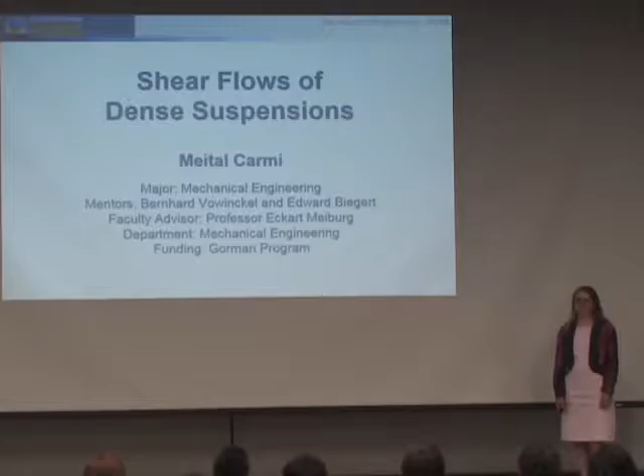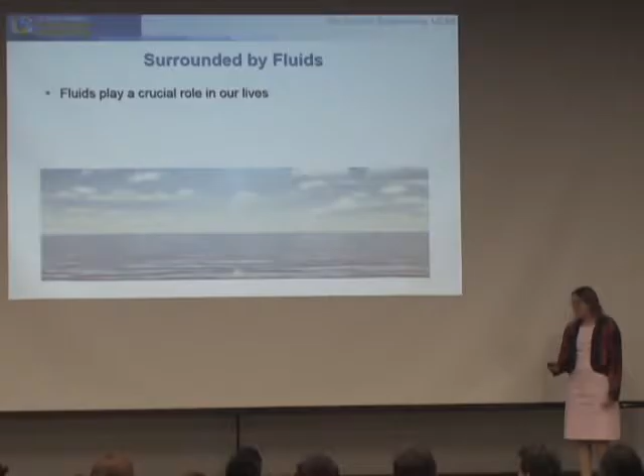Shear flows of dense suspensions with Bernhard Vowinckel and Edward Biegert. So, we live in a world filled with fluids. From the air we breathe to the water in our rivers and oceans, fluids are crucial to our everyday lives. However, we still don't understand many of their properties, such as the effect that occurs when a shear force is applied to a dense suspension.

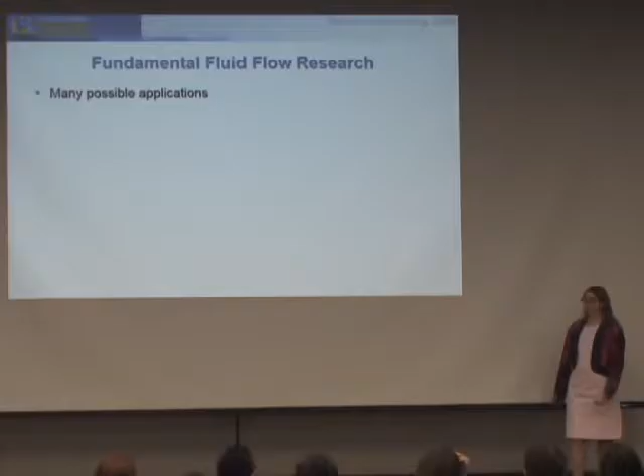Understanding this effect is the main goal of our research. We are doing fundamental research, meaning that there are a wide variety of possible applications, yet the only direct benefit is improving scientific knowledge. One possible application is to predicting and controlling mudslides and debris flows.

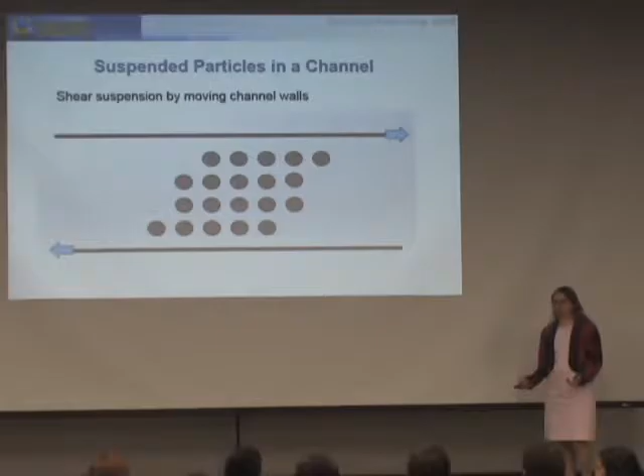So we are using a computer simulation to model particles in a channel. We apply shear force to these particles by moving the walls in opposite directions. This causes the fluid near the channel walls to move at nearly the same velocity as the walls, while the fluid in the center has zero velocity.

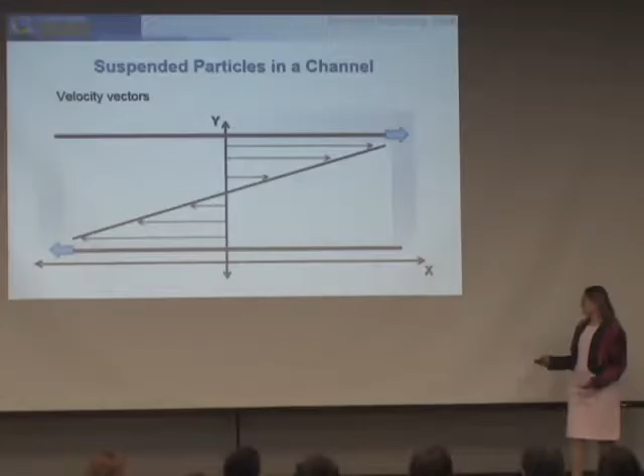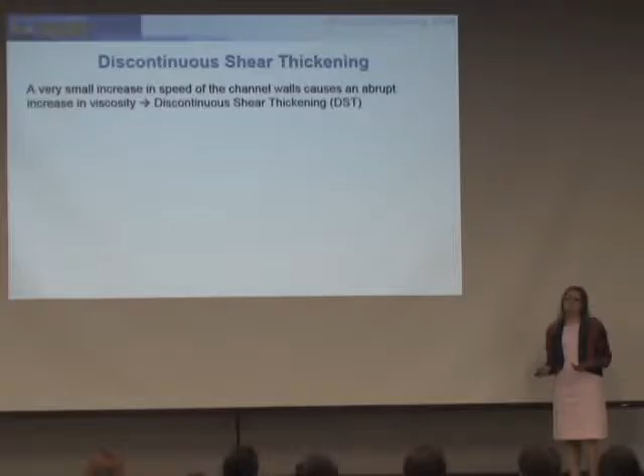So when we increase the velocity of the channel walls by very little, this causes an abrupt increase in the mixture's viscosity. And this effect is called discontinuous shear thickening, and causes the fluid to flow easily when the velocity of the walls is low, but to become very thick when the walls are moving faster.

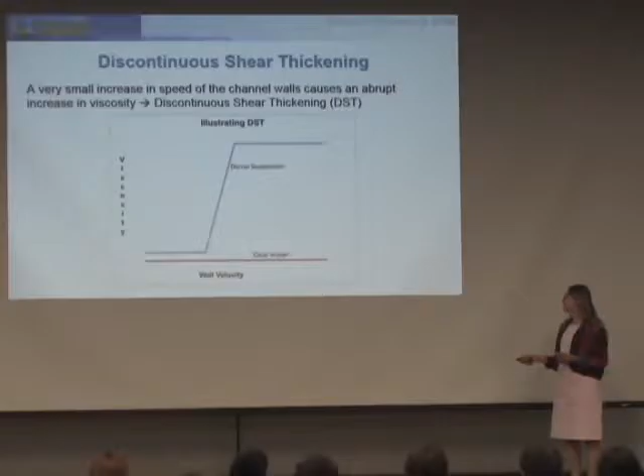And discontinuous shear thickening, or DST, occurs only in dense suspensions and does not occur in clear water flows, as seen in this graph of the viscosity of the clear water fluid and dense suspension as the wall velocity increases. Notice this abrupt increase in the viscosity of the dense suspension when the wall velocity is increased. This is DST. Also notice that the viscosity of the clear water is fairly constant.

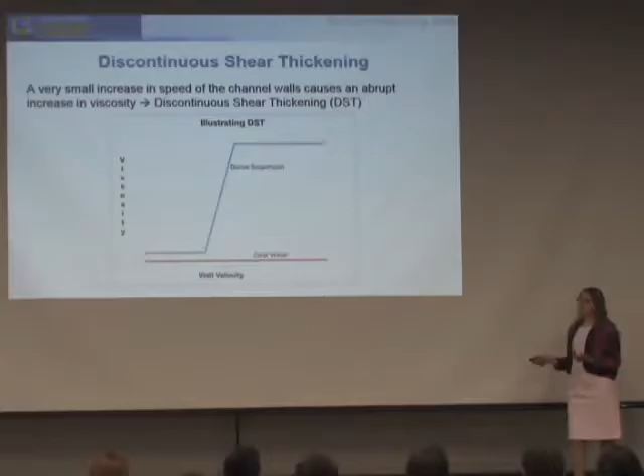And this suggests that DST is caused by some element of the particles' behavior, such as their clustering. And the main goal of our research is to understand the clustering behavior of the particles in the channel of moving walls that I just described.

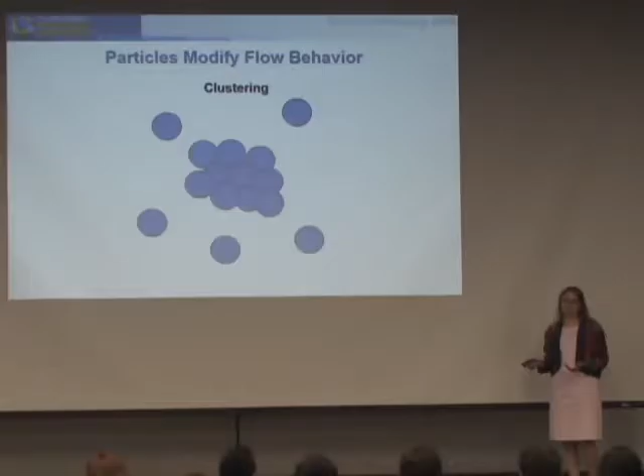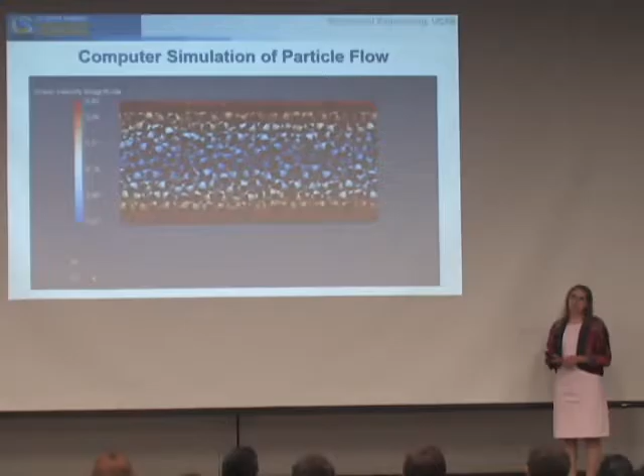So, this is an example of our computer simulation. You can see that particles near the walls are moving more quickly, and the particles in the center are moving more slowly. And this simulation models about 2,000 particles over several hundred time steps and outputs the position of each particle at every time step. And you can imagine this is a huge amount of data. So my job is to write MATLAB programs to organize this data to quantitatively measure the particles' clustering behavior.

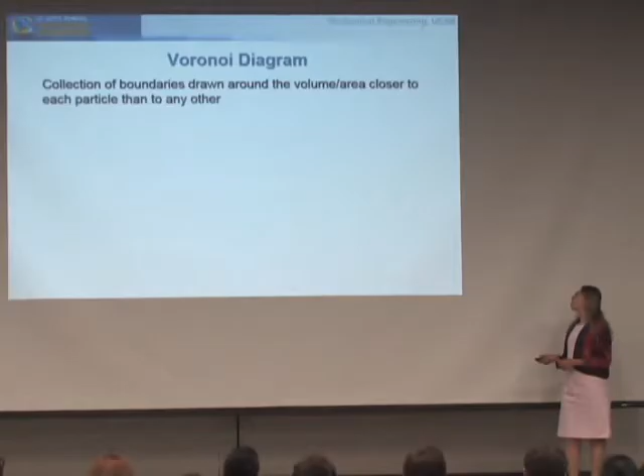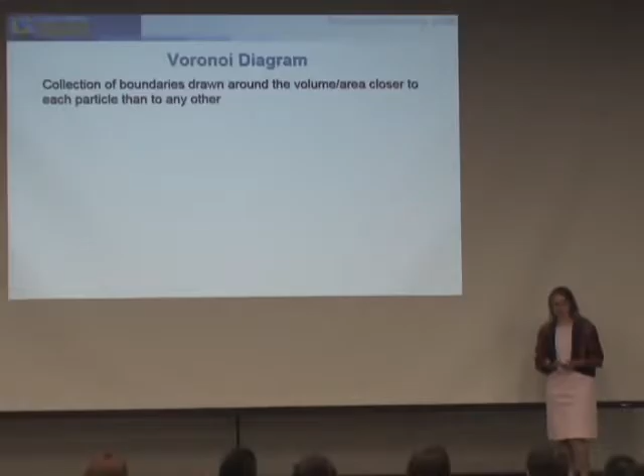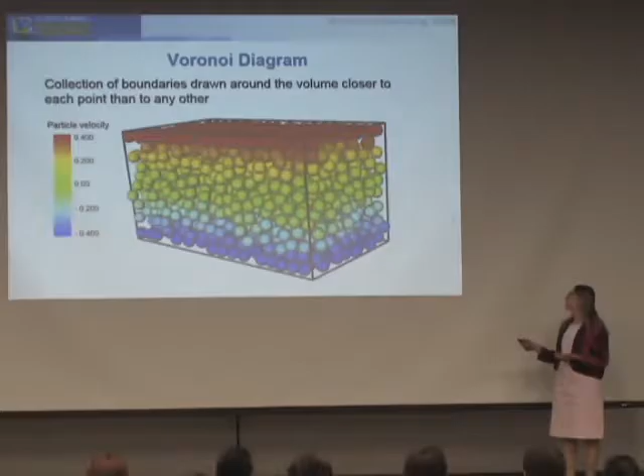Using the Voronoi diagram allows us to perform several calculations to quantitatively measure the particles' clustering behavior. Oh, and we apply the same concept described with the Voronoi diagram to our three-dimensional particles in the simulation to organize their position, as I said. So one such calculation that we can use from the Voronoi diagram is the volume of the Voronoi cells. And this gives us a measure of the particles' clustering.

So small volumes mean that the particles are tightly clustered together, while large volumes mean that the particles are farther apart. And then we graph the probability density function of these volumes to see the trend across all of the Voronoi cells. And a probability density function, or PDF, is the probability of being in an interval divided by the length of that interval, and measures the relative likelihood of a volume having a certain value.

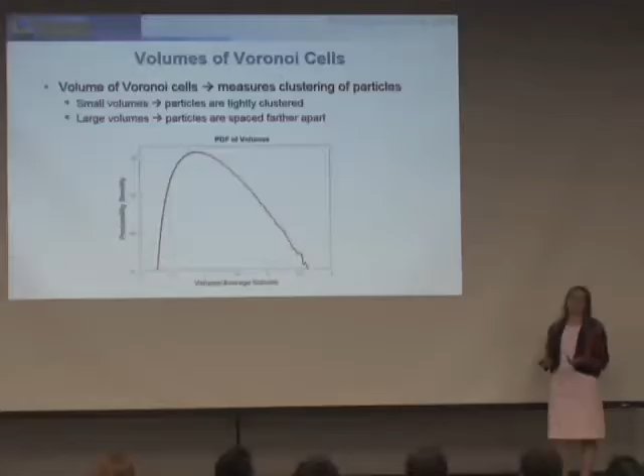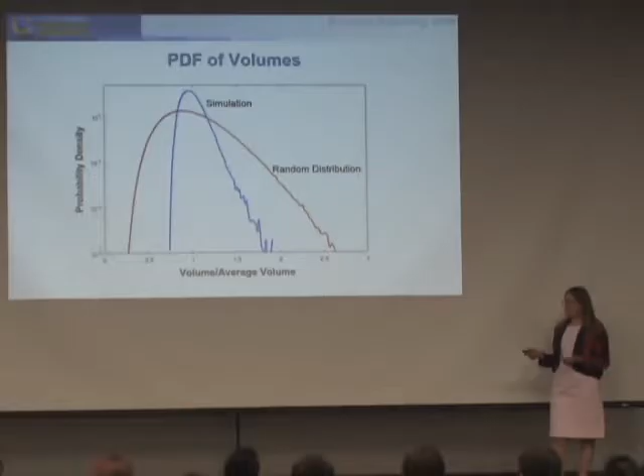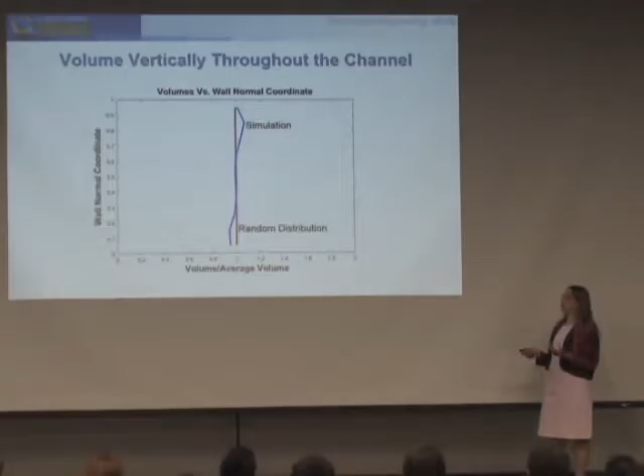To further analyze this volume data, we graph the volumes against the wall normal coordinate, or the coordinate perpendicular to the channel walls. And in this case, the volumes of the simulation are fairly constant vertically throughout the channel, which again suggests an even dispersion of the particles. And another calculation that we can perform is from the largest horizontal dimension to the largest vertical dimension of each of the cells.

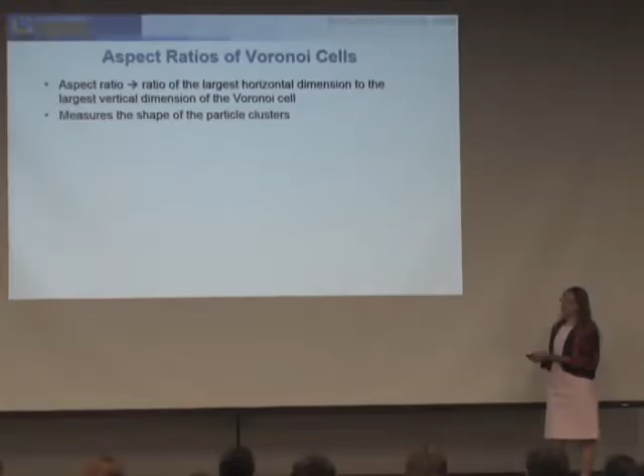And this measures the shape of the particle clusters. For example, if the vertical distance between particles is larger than the horizontal distance, then the aspect ratio would be less than 1. And if the horizontal distance is larger, the aspect ratio would be greater than 1. And if the horizontal and vertical distances are exactly the same, the aspect ratio would be 1.

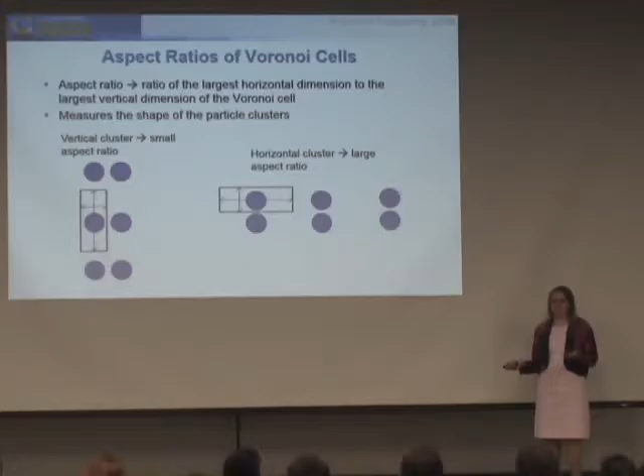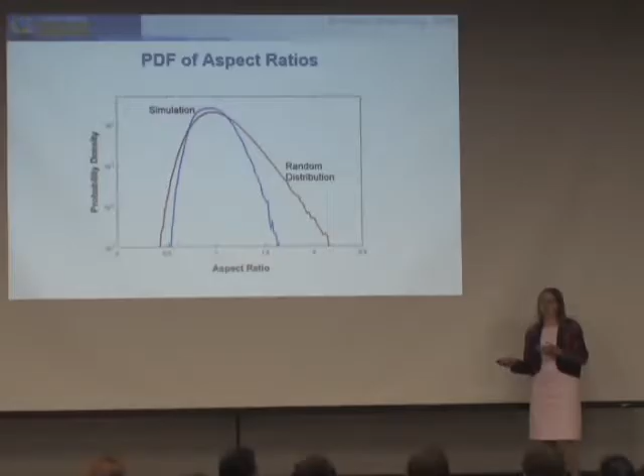So this is the PDF of the aspect ratios of the simulation data, again compared to a random distribution. And the simulation data is closer to and more symmetrically centered on 1, which again suggests an even dispersion of the particles, because this means that the horizontal and vertical distances between particles are about the same, or closer to the same than the random distribution. So this again suggests an even dispersion of the particles.

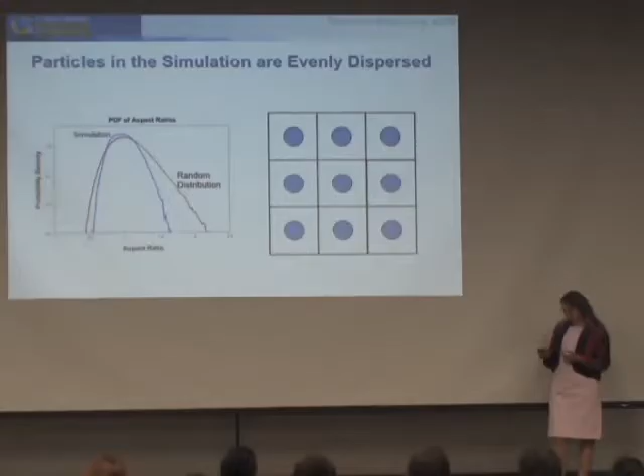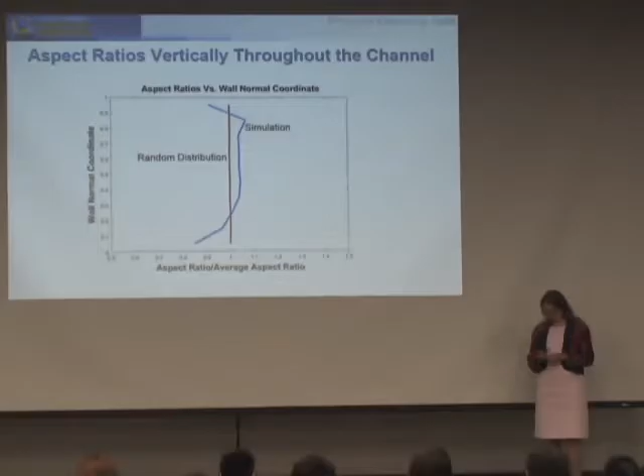And to further analyze this aspect ratio, we measure the aspect ratios vertically throughout the channel, graphing it against the wall normal coordinate. And we see that the aspect ratios are smaller closer to the channel walls, and larger in the center of the channel. And this means that the vertical distances between particles are larger next to the channel walls and smaller in the center of the channel, which suggests that there's less particles moving quickly near the channel walls, and then a large concentration of particles flowing more slowly in the center of the channel.

And this large cluster of particles in the center forces the particles to pack evenly, as we saw from the volume data and the other graph of the aspect ratio. So overall, this means that there is a layer of more clear fluid flowing quickly near the channel walls, and a dense cluster of particles flowing more slowly in the center of the channel. And this could possibly be one of the causes of DST, but a lot more research is needed to conclude this with more certainty.

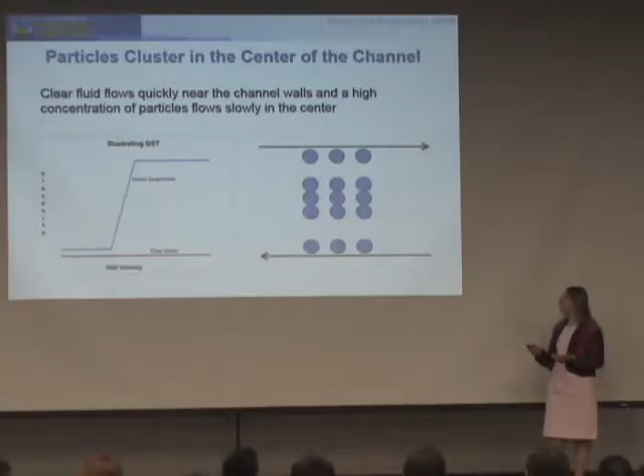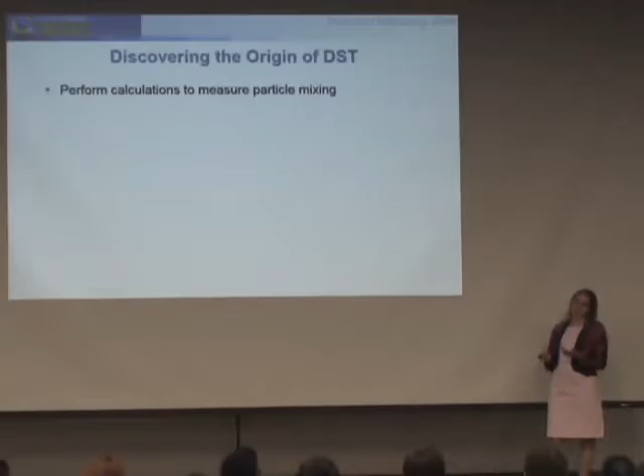And that leads me to the next step, which is to perform calculations similar to the ones we did to measure the mixing of the particles. And then we'll run more simulations varying the velocity of the channel walls and the number of particles in the channel to locate the threshold where DST occurs. And then once we've located this threshold, we'll compare the mixing and clustering of the particles on either side, and hopefully this will illuminate the cause of DST.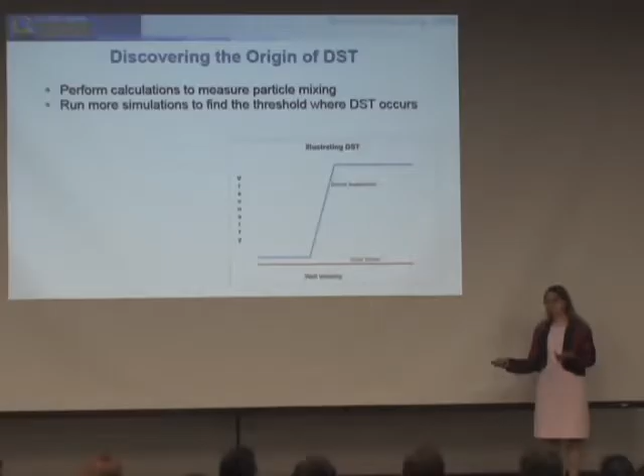What do you think causes them to cluster? Is it just that they're moving and there's curl in the fluid that makes them cluster in the center, or what? Probably. Yeah, it's just that they're moving more slowly, so that I guess forces them to cluster. Whereas when they're moving quickly, they're more spread out just because they're moving faster, I guess. If you move the walls fast enough, do you get turbulent flow? Yes, but in what we're doing, we're keeping the velocity low enough that our flow is only laminar, because that's what we're looking at right now. Okay.

Do you assume in your simulations there to be particle interactions or not? Like friction or electrostatic forces? Right now, the particle interactions are very low in the simulation, but that's another thing we need to look at in future research. Any other questions? Could you just quickly explain again DST? Okay.